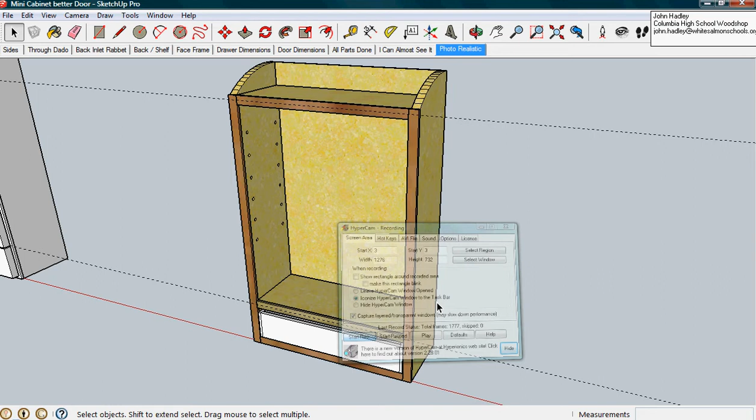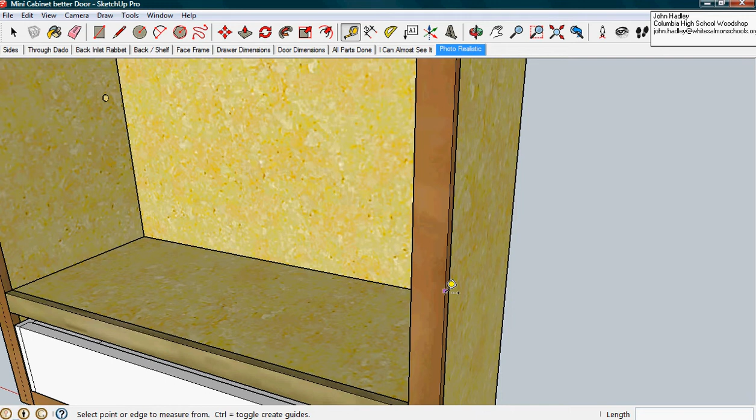Okay, let's go ahead and draw the door. Once again, my door needs to have room for the hinges, so the door doesn't actually go all the way to the outside edge - kind of a common misconception. This is 3/4 of an inch wide. I'm going to shoot for the middle, that's 3/8 of an inch. Make sure that I got that on the face - yes, I did. And then over here, same thing. I've already done the line on the top and the bottom to make it a little quicker, so this doesn't last quite so long.

And then when I put this on here, it's going to be a rectangle that goes down to the bottom, and it's going to be 1.5. Do you see on the bottom right hand corner it says approximately, that little up and down kind of sideways S line? I don't want that. That's slightly off and it'll mess up my drawing, so to make sure it's correct, I force it by saying 1.5, 19.25 - 1 and 1/2, 19 1/4, enter. And when I pull that out, 3/4 of an inch.

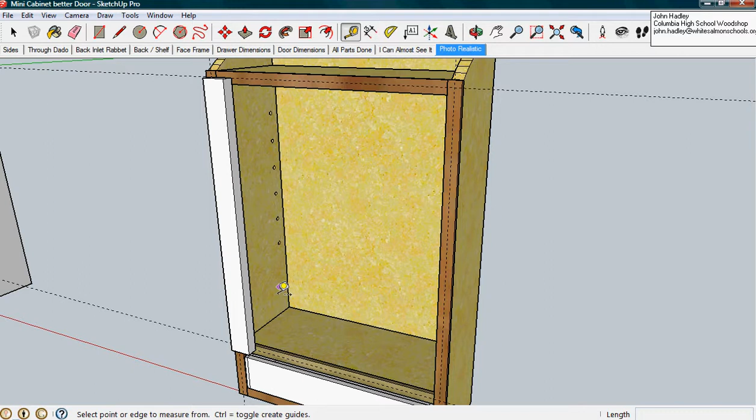I'll be able to go in here and put guides on that, so I can put my dado in there easily. Make sure that's on the green axis, so it's not coming out in the wrong direction. And so you can see how those are - they're on the surface. That's how I want them to be.

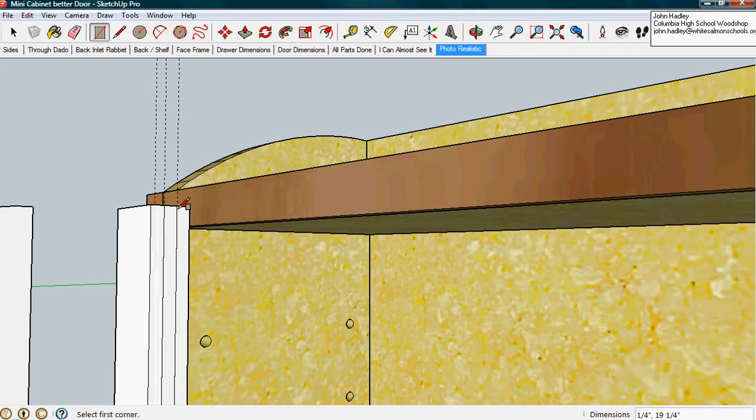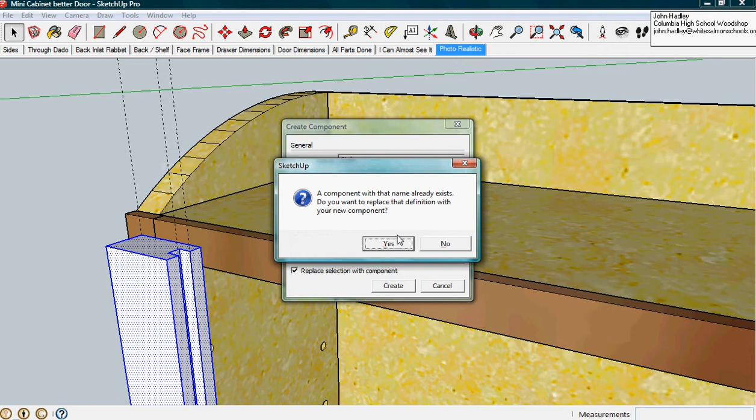And then, so I go to the top, bring that across so I can push that in 1/4 of an inch, and put that in here. And then I'm going to make this thing - 1, 2, 3, make a component. And I'm going to call this my stile. Yes, I do want to replace the other one.

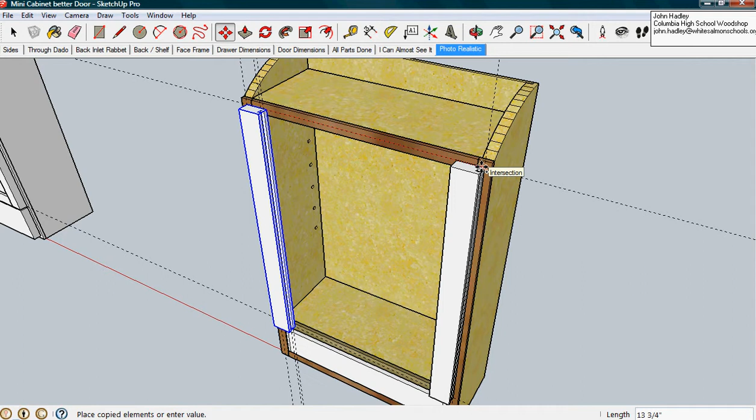That's from a previous practice drawing this. Okay, so as I bring this across to the other side, I'm going to stick it on right here, so I'm going to grab it from that - in essence, that mirrored point on the other side. Get it ready to go in there, make sure I hit the control key so I've got my original one, and then I'm going to right click, flip along my, I think, red axis. There we go.

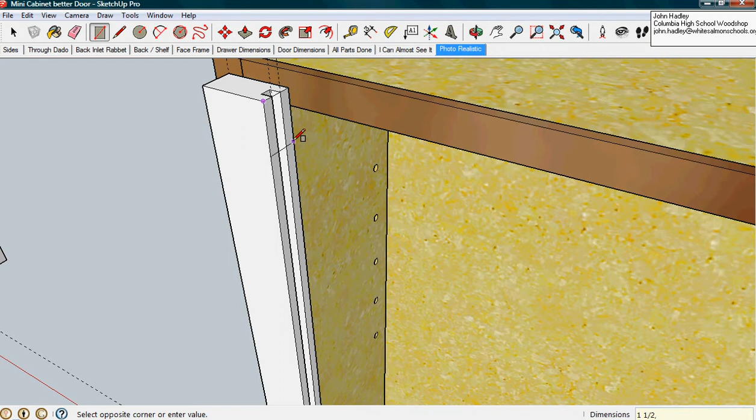So the next thing I'm going to do is put my other one over here. Now this is going to be the rail. On my rail, it's going to be 1.5 by 3/4 - 1 and 1/2, 3/4.

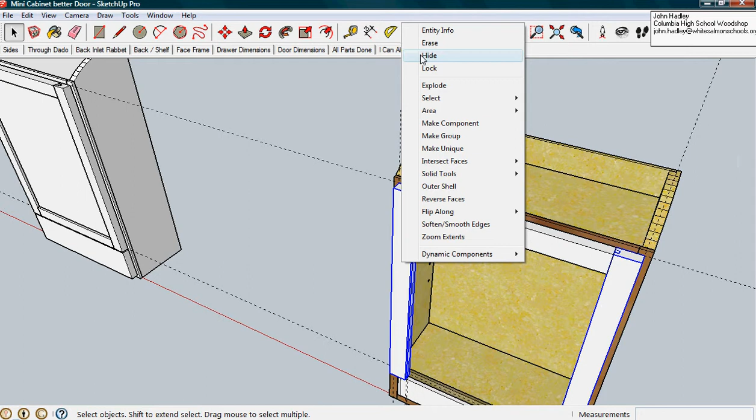And then when I put that in there, I'll be able to push this from here and go across to the other side. Here's maybe something you haven't seen before. If I go 1, 2, 3, intersect faces with the model, and then I take this, hold the shift key down so I can select both of these and hide them - I could do them one at a time. You'll see that where I said intersect with the model, I now have the tenon where I can pull it out right here.

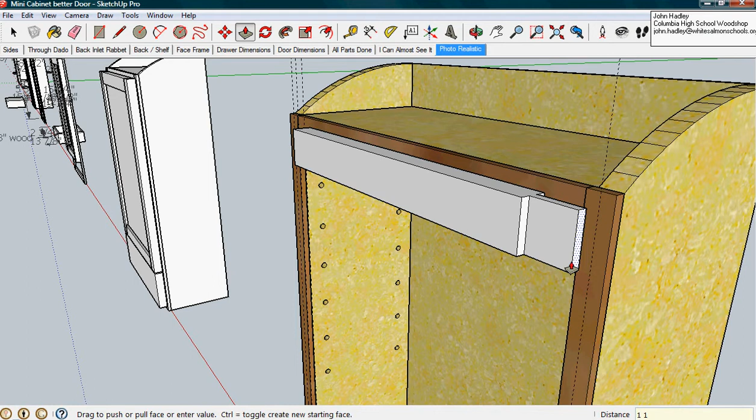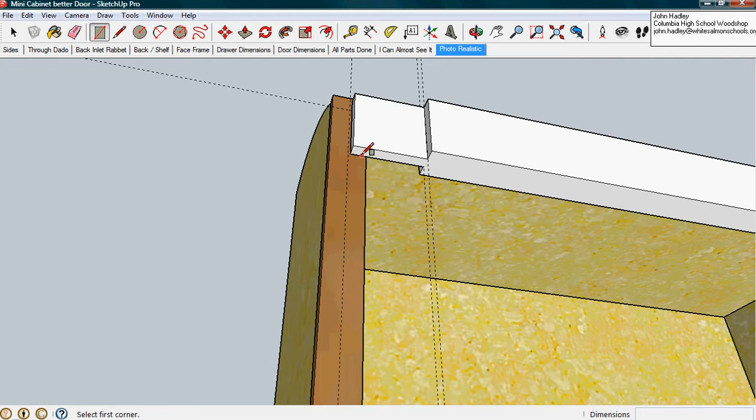So when I bring this out 1 and 1/2 inches, and then go over here, and I'm going to go out to right there, which is 1.5 inches, as you see. Then I can take this and see how I need to have my dado into the bottom of this, but that's actually very easy to do now since I have some guiding points kind of built in here. I can connect there and there, push that up 1/4 of an inch - there it is, to 1/4 of an inch.

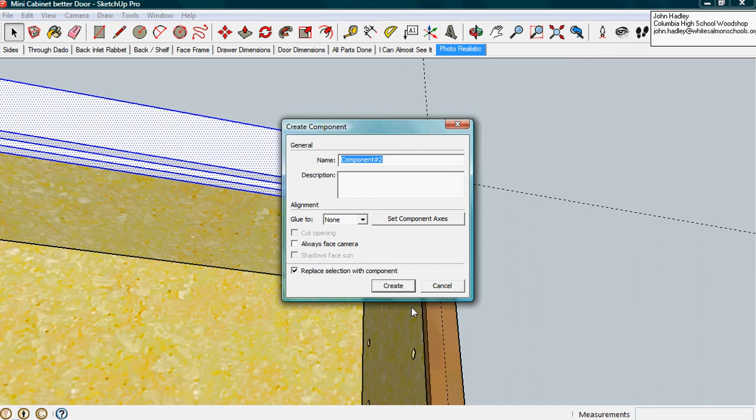And then I'm going to take this piece and go 1, 2, 3, make component. This is going to be rail 2, and I'm going to call this rail 2 so I don't mess up my other components that I drew earlier. Okay, and then I'm going to take this now at this time, and I'm going to go ahead and say-

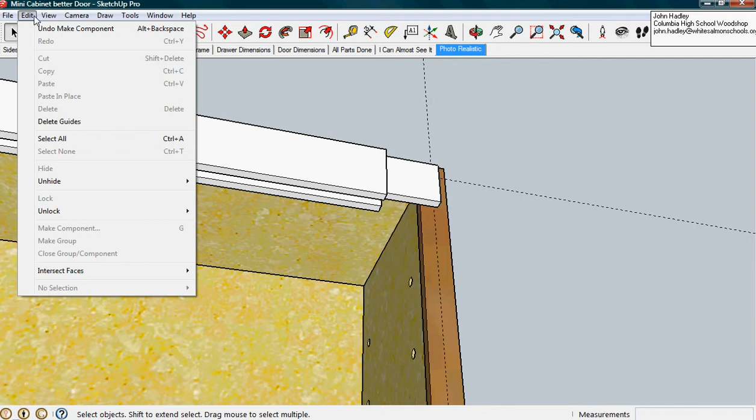I was going to unhide everything, and notice that I've got this running into the other one. There's kind of a problem there, so I've just got to go here and go hide that one for a moment. Then when I take this and go inside of it-

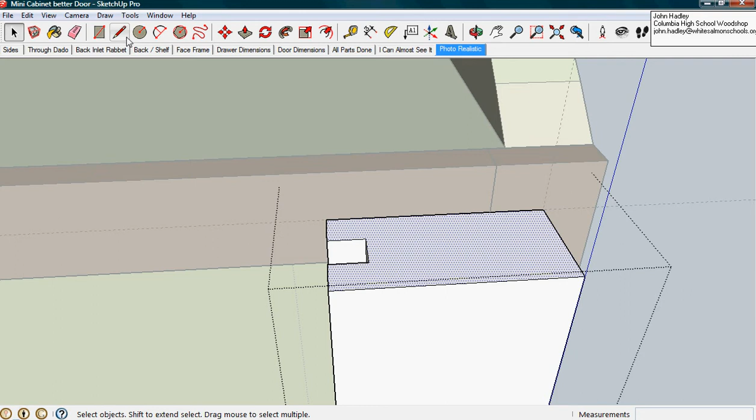and select that one, I can select this, come across and push that down. And remember, it's - whoops, escape. I can push this, I need to push this down to my other dado, but it's 1/4 of an inch. The other dado goes up 1/4 of an inch, so I need to take this down 1 and 1/4.

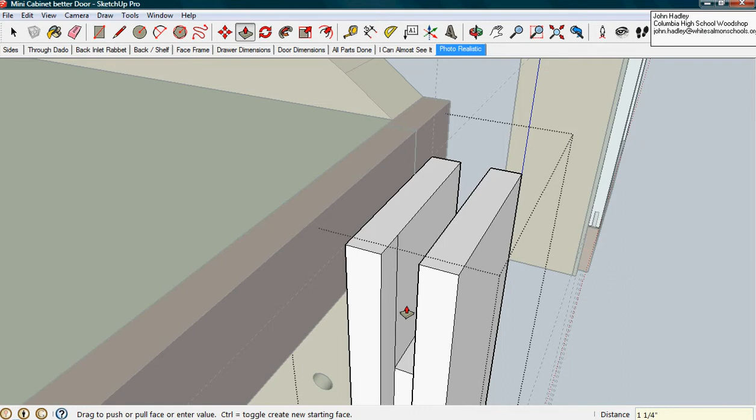It goes to there. Notice that did it to the other side as well, right? So really all I have to do now is do that on the bottoms.

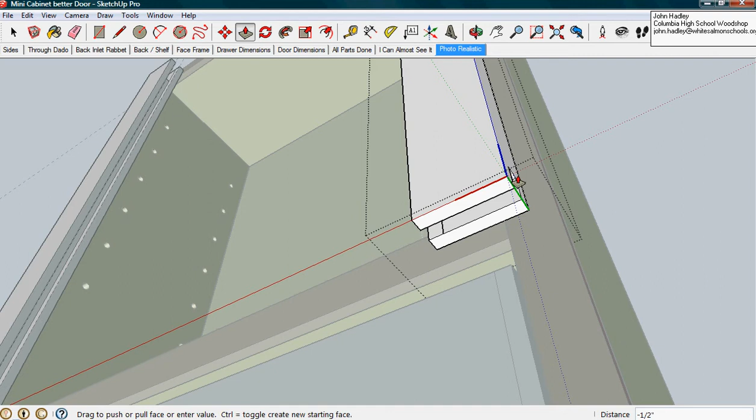Reference that corner, it pulls out straight, much easier. Push that up. One and 1/4. See how I did it on the other side, and then edit-

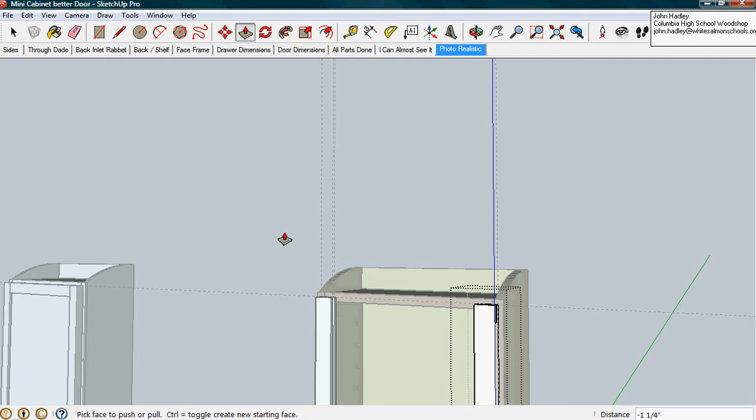unhide all. Then when I go back and look at those top ones, I'm going to do that again. It's trying to unhide that. Edit, unhide all. Then I can see the other one and see how it's in there correctly.

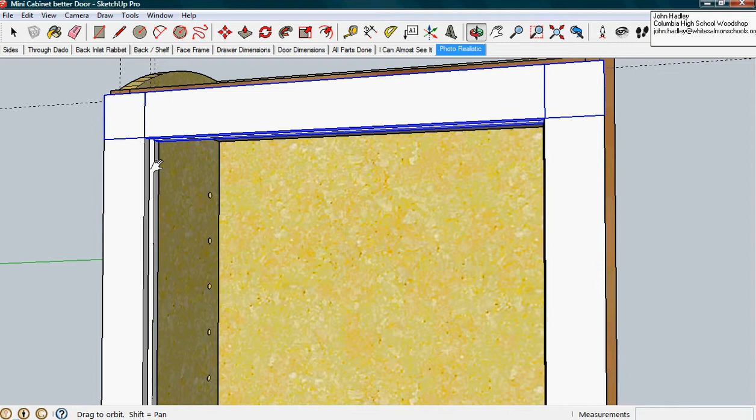Last thing to do here is to move this one to the bottom. I'll be able to take this and grab it right here. Hit control. It should still reference in nicely right there. Of course, the dado's on the wrong side. Flip along - up and down is the blue axis. Should be right there. And we have our door drawn.

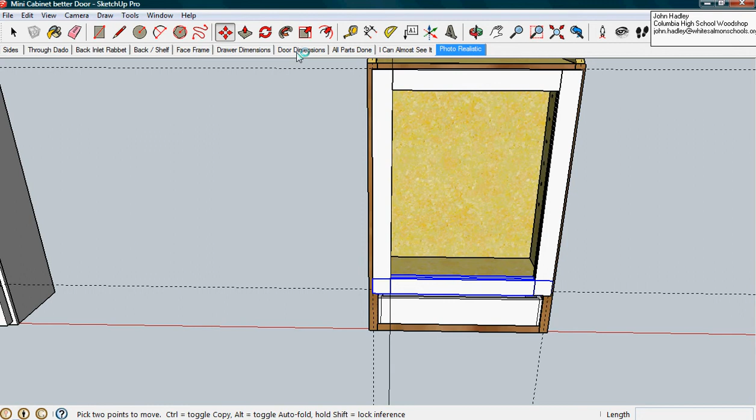The last thing we're going to need to do is to put our dimensions in, and it's going to be something that just draws in those dimensions, which we've already shown you how to do. And so that concludes our little demo on how to draw a set of doors-